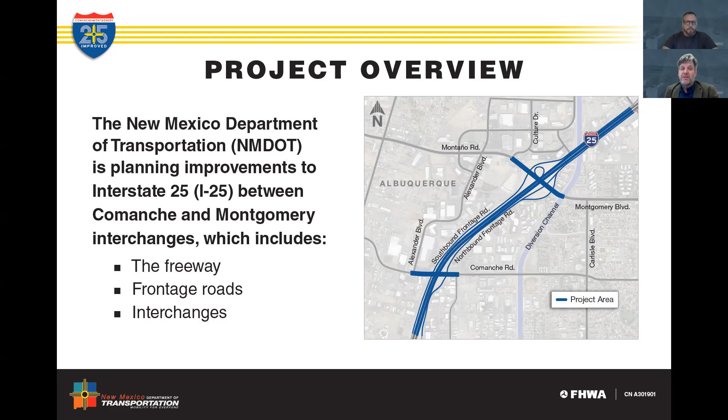I'm going to turn it over to Joe for a bit to kind of describe how we got to this point. Thanks, Mike.

This project is building on analysis from past studies that we've done. The studies evaluated about 7 miles of roadway along I-25 from I-40 to Tramway. We began these studies in 2010 with a phase 1A, an initial corridor study. That was followed up in 2011 with a phase 1B, which looked at and analyzed alternatives for this corridor. A couple of projects came out, and then in 2016...

We supplemented the phase 1B with an updated study to capture growth in the Albuquerque area. The phase 1A study evaluated existing and future deficiencies based on the Council of Governments' projections for traffic along the North I-25 corridor, and proposed strategies to address some of these deficiencies.

That kicked us into a phase 1B. The phase 1B identified the need for the I-25 corridor and the purpose for these improvements, along with alternatives that were analyzed to meet the purpose and need. From that study, we had a recommended final alternative that we're looking to implement through this corridor. The supplemental phase 1B, done in 2016, captured improvements from a couple of projects.

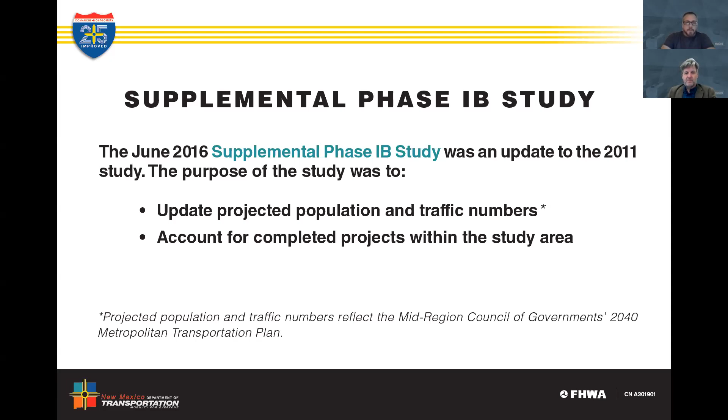The northbound widening was constructed in the winter of 2012. The I-25 PDN, Paseo del Norte improvement project, was completed in 2014. Southbound widening from Jefferson to San Mateo was completed in 2018.

Previous planning studies that I mentioned have established the I-25 corridor needs and improvements. The following purpose and needs for I-25 from I-40 to Tramway apply to this current project: improve efficiency to the freeway, improve efficiency to ramps at Comanche and Montgomery, frontage road improvements, and interchange bridges.

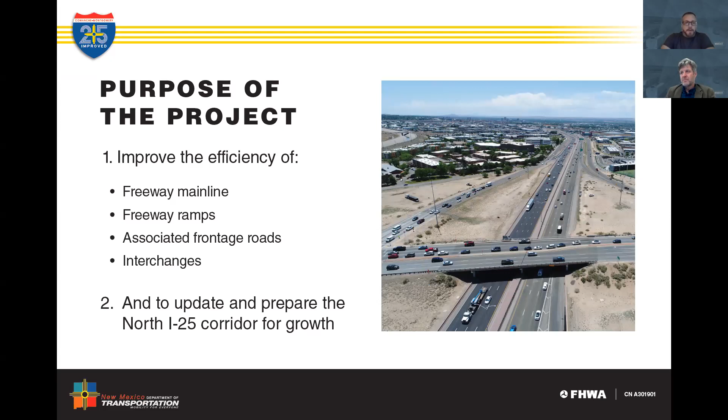The North I-25 corridor project is to address the continued growth in Albuquerque and the surrounding areas. Improvements are needed to address travel demand and congestion, physical deficiencies with roadway geometry and bridge heights, and safety issues with merging on and off ramp traffic.

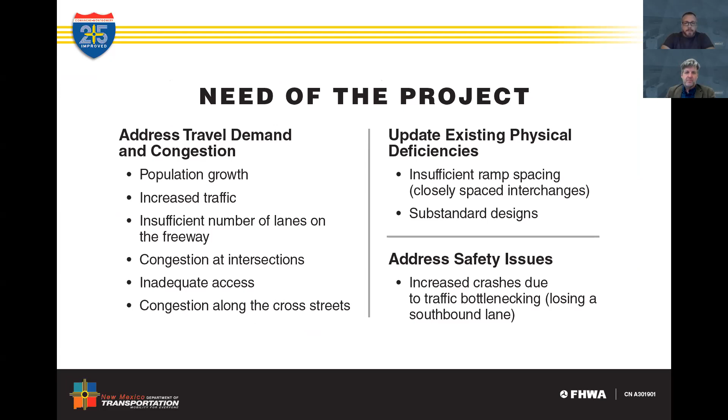I'm going to hand it over to Mike. He's going to talk a little more about traffic conditions and the proposed improvements for this project. Thank you, Joe.

Efficient freeway operations depend on a balance with capacity exceeding the demand. Current conditions are resulting in congestion when traffic demand approaches or exceeds the available capacity of the interchanges. For example, southbound I-25 bottlenecks in the morning where I-25 loses a fourth through lane underneath the Montgomery overpass. The signalized intersections on Montgomery Boulevard back up, particularly during evening rush hour, and oftentimes require drivers to wait for multiple signal cycles.

The interchanges are operating at capacity, and the existing frontage roads and business access points conflict. If improvements are not made, congestion and delays are only going to continue to get worse as the area continues to grow. Those 2040 traffic conditions have shown us that there will be increased congestion and delay at the intersections adjacent to the freeway and on the freeway, including its associated on and off ramps.

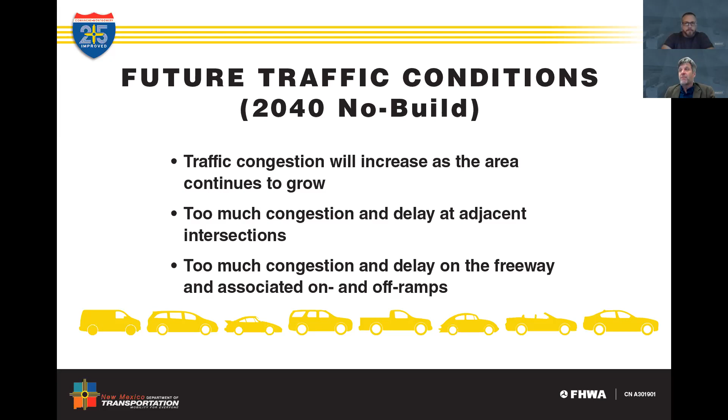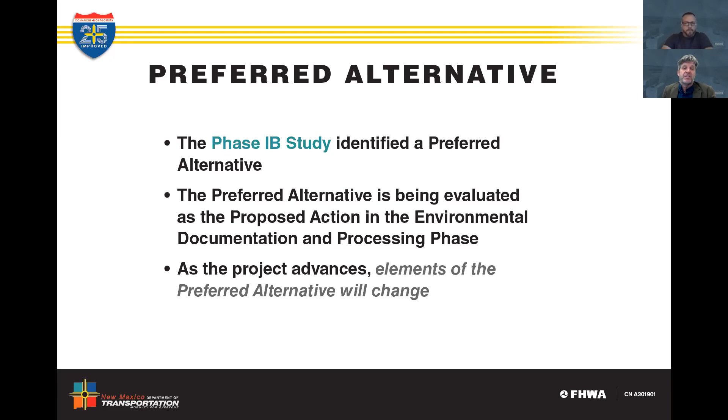The preferred alternative - Joe described the phase 1B study. It identified the preferred alternative, which will be evaluated as the proposed action in an environmental documentation and processing phase for the project. The designs we are showing today we expect to change as the project progresses and advances, but the overall project goals will remain the same.

A little more detailed description: improvements at the Comanche Road interchange would include a new and wider bridge over Comanche Road. It also includes advanced U-turns on both sides of Comanche Road, or as I refer to them, the Texas turnarounds. In the case of Comanche, those would go underneath the bridge.

The on and off ramps will be reconfigured, and there will be improved connectivity through the interchange for both bicyclists and pedestrians along Comanche Road by constructing sidewalks and buffered bike lanes on both sides of the road. In addition, businesses and properties in the area will have some adjustment to their accesses in order to improve those operations.

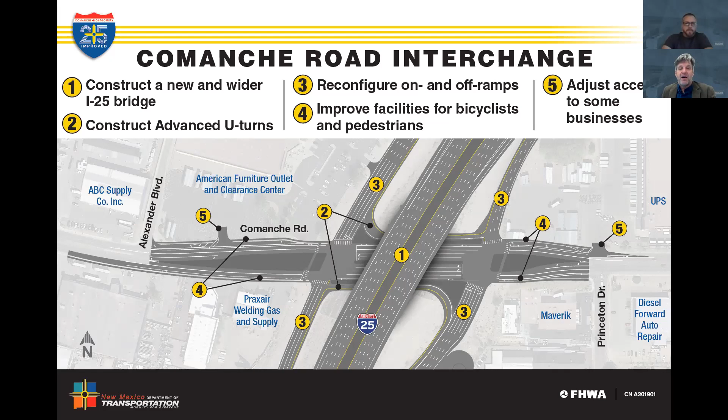Then on I-25, improvements include constructing an additional southbound lane, again beginning north of the Montgomery Boulevard interchange, tying into the current loop ramp entrance lane. And then it also includes lengthening of auxiliary lanes.

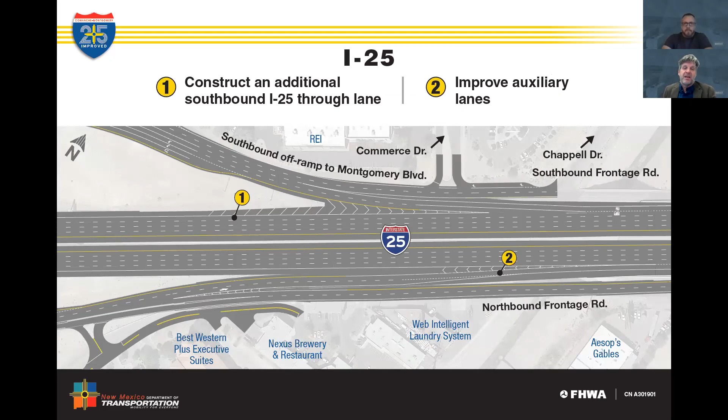Frontage roads would be improved, with construction of braided on and off ramps on both sides that cross over one another to separate entering and exiting traffic. These braided ramps would help eliminate merging and weaving conflicts similar to those at the northbound on-ramp from San Mateo and the northbound off-ramp to Ellison, north of this project. This entire configuration reduces weaving movements and streamlines traffic flow on the freeway. This improvement would result in some changes to business access in that immediate area as well.

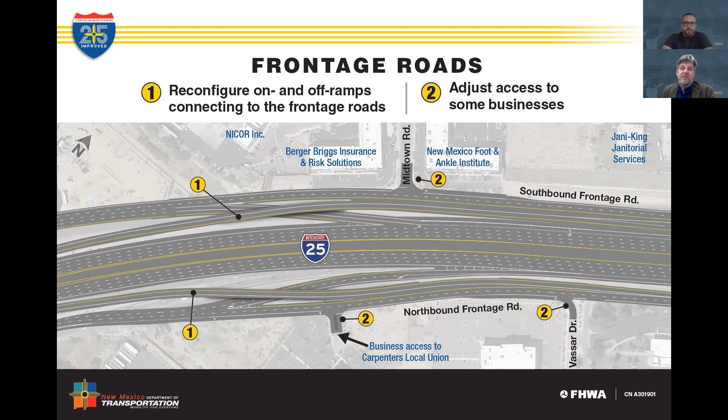Then the Montgomery Boulevard interchange improvements would include construction of a new, wider bridge, about twice as wide as it is today, over I-25. That includes the addition of through lanes for 3 through lanes in each direction, and additional turn lanes. It also includes construction of advanced U-turns, or Texas turnarounds, on both sides of Montgomery Boulevard to enhance the function of the frontage road system.

It includes reconfiguration of on and off ramps. At Montgomery, it also includes improved connectivity for both bicyclists and pedestrians with the inclusion of buffered bike lanes across the Montgomery Boulevard interchange, sidewalks on both sides of the interchange, and a new trail connection between Montgomery Boulevard and the trail along the north diversion channel. Again, a number of the accesses will be adjusted for some of the businesses in the area.

And I'm going to turn the time back to Joe to talk about the proposed aesthetic theme.

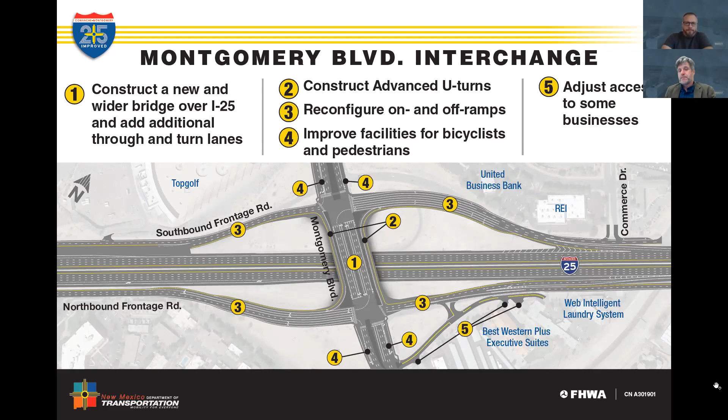Thanks, Mike. To tackle the aesthetics for this project, an appointed committee made up of local leaders from the city, state, and the artist community was used, along with the call for entry, known as the CAFE process. This process was used to solicit aesthetic recommendations for the I-25 Comanche project. Ultimately, after looking through several artist concepts, the committee selected artist Kenny Davis. His artwork will be applied throughout the corridor. This theme is a blue diamond.

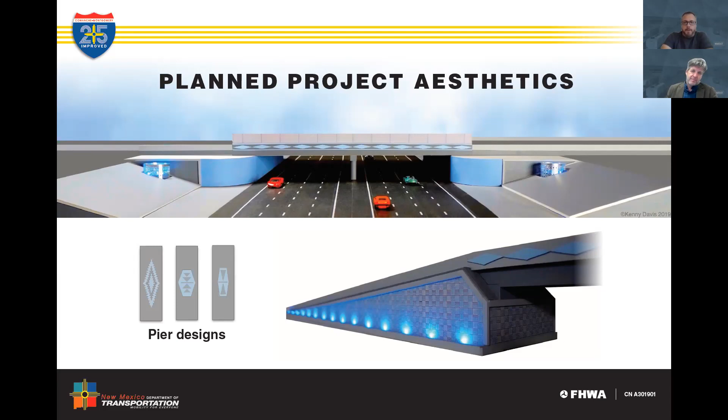It uses textures, colors, and lighting applied to structures like the bridges and some of the retaining walls. You can see on this slide some of his concepts, the diamond pattern at the top of the bridge, and the lighting and color applied to the base of the structure. This theme and concept will be applied throughout the corridor for the piers, some of the retaining walls, and whatever else Kenny comes up with. So we'll review his concepts and keep working with him to fine tune what we're looking at.

The next part of the project, phase 1C, is the environmental documentation and processing phase. This phase began earlier this year, spring 2021, and the purpose of this environmental phase is to meet the National Environmental Policy Act, known as NEPA, as outlined by FHWA.

Within that study, we're looking to identify some environmental factors for the project. Some of the resources and factors being considered include noise, air quality, biological factors, cultural and visual resources, land use and development, community services, access to community facilities, safety, and some others.

What we're planning to do is analyze and document resources that are there, determine if the resources present could be impacted by the project. Then the design build team will work together to minimize impacts during design development and construction.

Environmental commitments will be developed to ensure project impact avoidance, minimization, and mitigation occurs during construction. These commitments will be given to the contractor as part of performance specs so that they can be carried from study through construction. The final environmental documentation will serve as a project authorization for our final design, our right-of-way process, and construction. I want to pass it back to Mike to talk about some of the timing of the project.

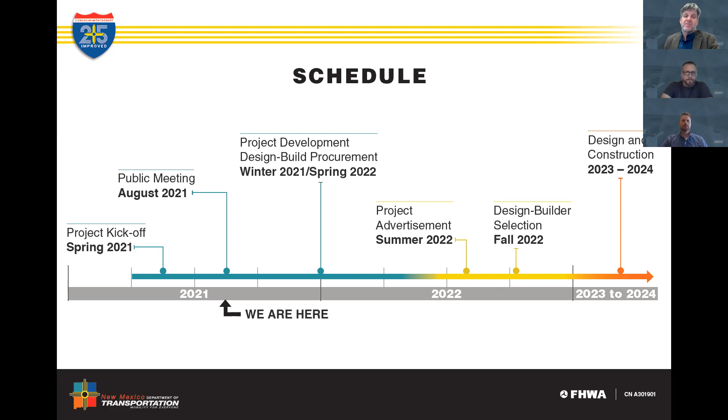Thank you, Joe. Our team will continue to develop the design and complete the environmental process in early 2022. Then by summer 2022, the project will be advertised for design build proposals. By fall 2022, we're expecting a design build team to be selected who will both design and construct the project, beginning in early 2023. That project we expect to last through the year 2024.

A little bit on final design and construction: the selected team will both design and construct the project simultaneously under one contract. Design build is being used as a project delivery process because the selection encourages innovative solutions to be brought to the table through the competitive environment of that selection, for an overall best value to the project.

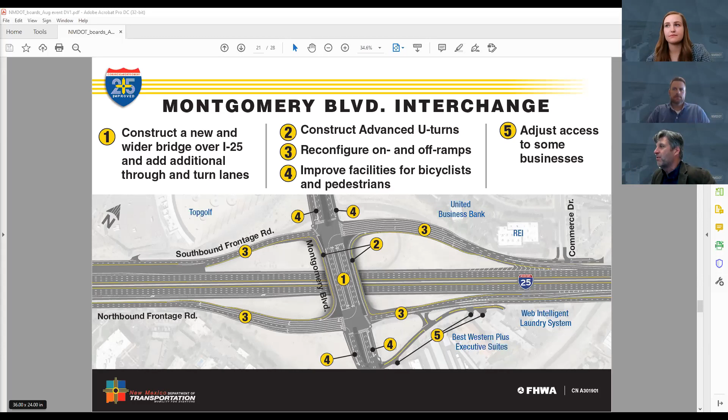But then also there is a secondary access connection point, and it shows up right above that number 5, which says Best Western Plus Executive Suites. Right above that, there's an additional connection there for those properties and businesses to provide a frontage to the frontage, if you will. So I hope that answers the question, but yes, there is a raised median plan to go across, because for an unsignalized intersection, there's just too much conflict.

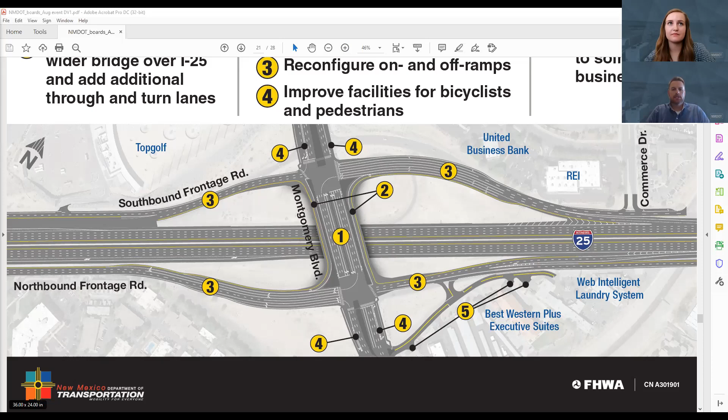Mike, I do want to point out as well that if anybody has specific questions about the design, you can go to our website, and on that comment map it does have the current design. If you have questions about what you see on that map, it's interactive, you can leave a comment, zoom in and out and see some of those details that Mike was just referencing. If you see something you don't understand, feel free to reach out. We want to answer your questions as best we can.

Thanks, Bo. So one of our last questions we want to wrap up with is how can you provide input? So that's a great question and a great time to review. You can submit feedback through the interactive comment map on our project website, which is I-25improved.com. That's what Bo was mentioning earlier. There is an interactive map that you can zoom in and leave your comments on.

In addition, you can call the project hotline, which is 505-785-ROAD. You can also email the project team at info@I25improve.com, and you can also mail in a physical comment form. A form can be found on our website as well as at the NMDOT District 3 offices or the Albuquerque City offices.